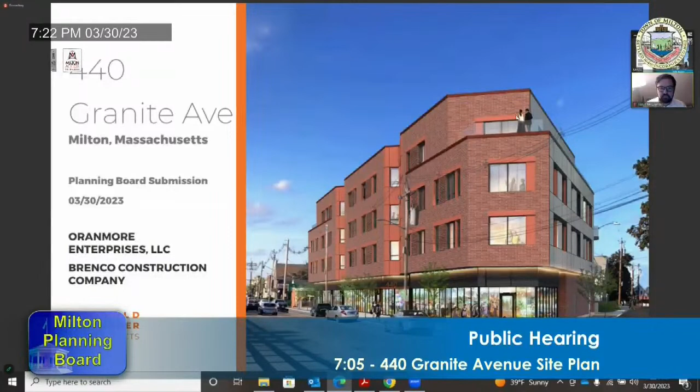So I think we're going to run through really what the substantive changes are. I know many of you are quite familiar with this project already, so I'm going to just go right at it. The main things we're going to discuss tonight are probably on several fronts. One is the design and material of the exterior, which I think is a pretty substantive change. The other big change is the parking situation. So let's just move right into the next slide.

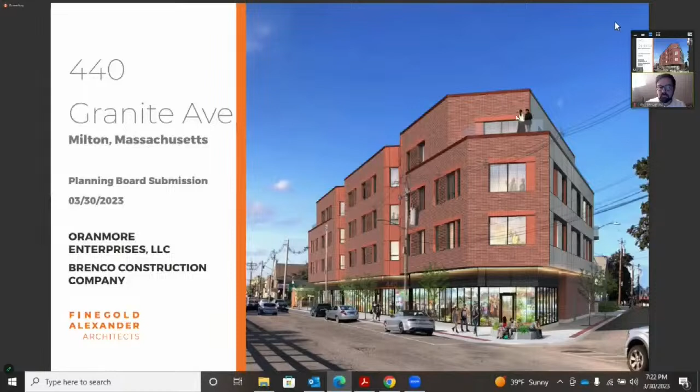Sorry everybody, I'll figure this out. Okay. Just going to have to do this old school style. Sorry. That's fine, Sam, that's fine. And I know that you folks, I believe, have the hard copies in front of you as well. Yes, in case you can't read this.

I'm going to just summarize the key things that this summary chart puts together. On the left-hand column, this is again the program for the project. The parcel is 20,212 square feet. We have total residential and retail support gross square feet of 46,253. Parking, which I'll explain in a minute, is 15,873. The total project size, gross square foot, is 62,126 square feet. The height of the project is 53 feet 2 inches. The residential mix is 24 units, of which 22 are 2 bedrooms and 2 are 1 bedrooms. Of those 24, 2 are affordable, 1 one-bedroom, 1 two-bedroom. And the commercial spaces we're going to show you tonight are 3 commercial spaces on the ground level, totaling 3,983 square feet.

With respect to the parking update, we've revised the design, but here are the facts. We now have, instead of the automated parking system, a conventional parking garage. So in the lower level garage, we have 19 spaces in what we call the basement, in that lower level.

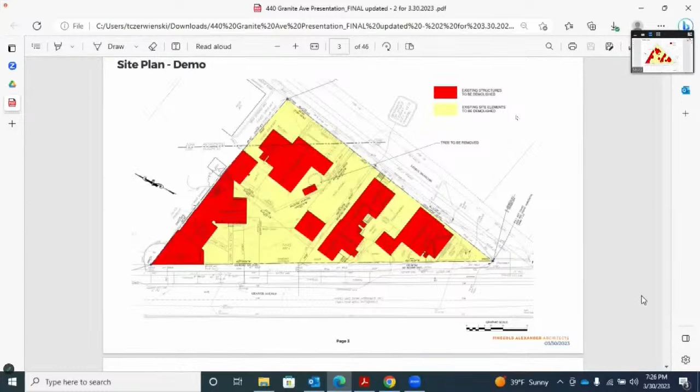This is the site plan. I'm going to get more into the details on the next drawing because this is just showing the context of the building in relation to the site.

I'm going to explain the primary changes here. The biggest change is that we have a more conventional garage. Coming off Mechanic Street on the ground level, the garage enters pretty much where we showed it before, but we are not doing the automated system.

This is conventional surface parking at grade, allowing a total of 16 spaces: 10 spaces for the units, 2 handicap spaces (one usable as a van space), and 4 spaces available during the day for the commercial owners of the retail tenants in front, which could also become overflow visitor parking after hours when commercial isn't using them. That totals 16 spaces on this first floor level.

In addition, off Mechanic Street at grade there are 5 surface spaces dedicated for commercial and visitor parking. So 16 here, 5 here. The other big change is that we created another access route, a ramp down to the basement garage below, shown at the edge here, dropping down into the garage underneath.

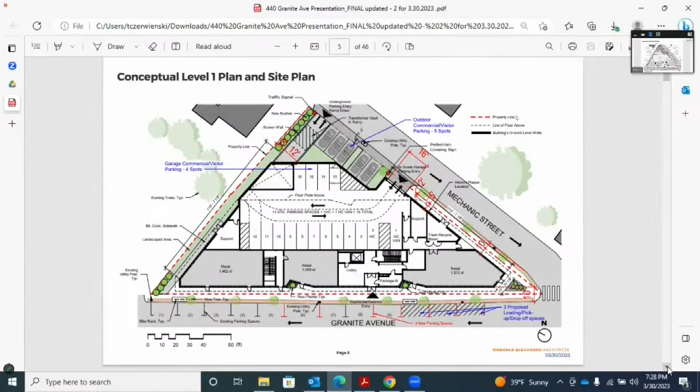Now when we come down that ramp off Mechanic Street to the lower basement level, we show a total of 19 parking spaces, all dedicated for residential use. This is a conventional parking garage underneath, with additional bike storage and unit storage here.

So this is again a major change in the overall design for the project. Any questions on that? Okay, thanks.

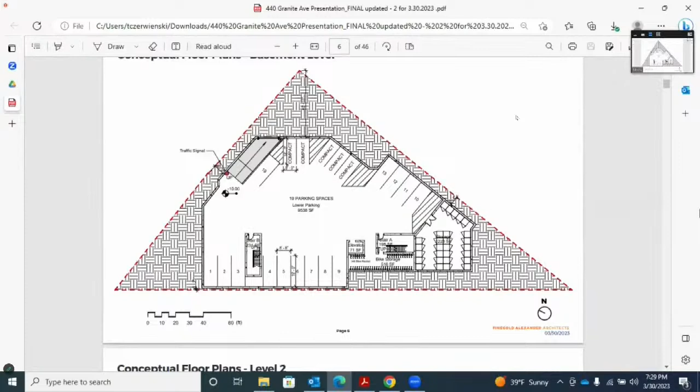I'm just going to go fairly quickly through the plan unit layouts. It's very similar to what you've seen before.

On the second floor here, we essentially have 8 2-bedroom units, one bedroom unit. This unit here is designated as the affordable unit, which is the one bedroom unit.

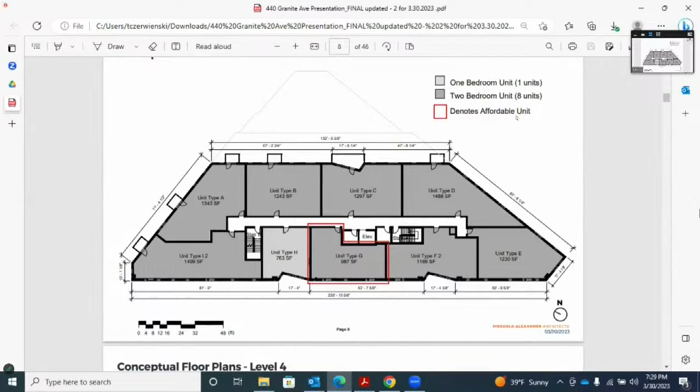On level 3, a very similar plan as level 2, but now this unit is designated as an affordable unit, which is a 2-bedroom unit.

Level 4, we have essentially just 6 2-bedroom units. Again, at the top level is set back from the edge by these continuous decks that you see outlined at the edge here and here.

The roof plan is, again, quite similar to what we've shown you before. The central area here is the screened-in mechanical, which also deals with the elevator stair overrun. We have proposed to create solar PVs. We still want to create a very sustainable project in the overall design, so that is the intent, to try to maximize the extent we can for solar.

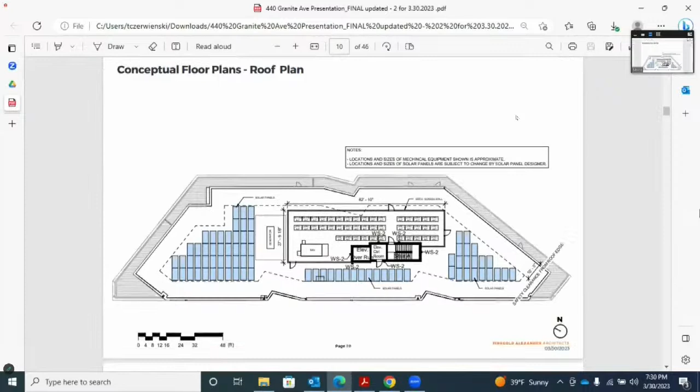I think what I'm going to do is just quickly go through - the elevations are black and white, but we have some colored elevations. I think it's more useful.

Just the key things to point out: the 53 feet 2 inch height is to the top of the roof of the 4th floor. That does not include the mechanical penthouse, which is an additional 8 feet above that. The main body of the building at 3 stories is 41 feet 2 inches. That is the governing number that drives through the whole design.

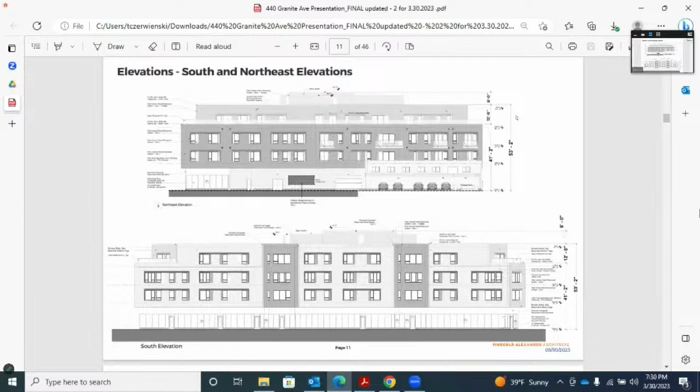The same thing's operating on basically the north and northwest, which is mostly Mechanic Street. Let's go to the next, which is getting into some of the color elevations.

This is the elevation shown along Granite Avenue here. This is like a section cut through the highway. But here you can see the design as it relates to the overall street context. Ground floor retail occupying the entire level, which you can see mostly glazed. This is the residential component here.

The 4th floor does set back at the edges here and here. And we still have the idea of these notches which carve in here and here to break up the overall mass in relation to the overall form.

But the biggest change, of course, what you're seeing here is color and material. We've really moved it to essentially a red brick approach. We'll get into more of the details, but we heard comments and we reacted, so I think we've moved it away from the previous iteration, which was more grayish color. So we're really proposing a red brick, and we have actually some samples here which we can certainly share or pass around if you like.

The other elevation that was asked for that we hadn't shown before, which is essentially the northeast elevation. This is the view from the bank, looking here. So again, Granite Avenue is here on the right, and this is a straight-on elevational view.

Here you can see essentially the edge here. This is where the brick turns on the corner, and then it goes to the plank system here, which is more rendered, sort of almost clapboard style from here back.

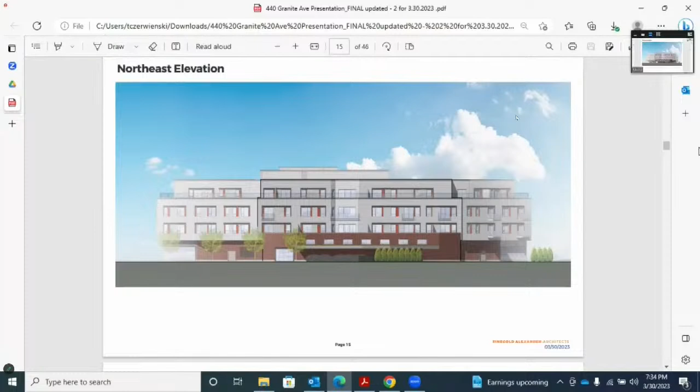So again, this is the before view from Granite Ave in the corner.

And here's the proposed redesign. Besides the coloration shift, we made adjustments where we took more of the brick and wrapped it to the corner. Previously this panel, we're introducing more brick to make the mass feel more substantive rather than just a facade. Then there's the introduction of notches, a panel system in between to break the scale. The ground floor retail is largely glass to create as much transparency along the street. Here you can see where it transitions to the panelized system on the side. That lighter gray color is where the brick turns the corner, and you can see at the bottom the brick also picks up here and wraps around the back on that elevation previously shown. So this is a major change in materials and color shift, and I'll get into some details surrounding the window frames as well.

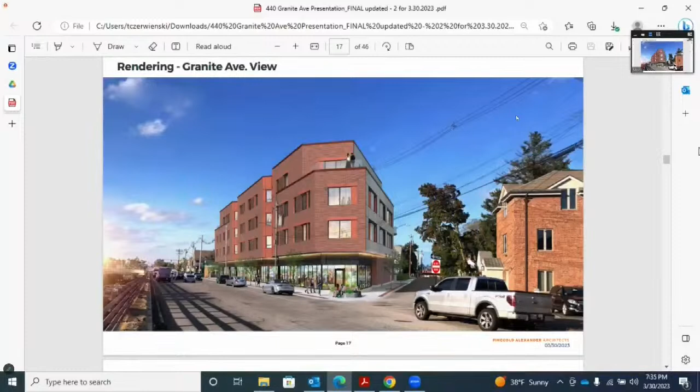So again, existing view from Mechanic Street.

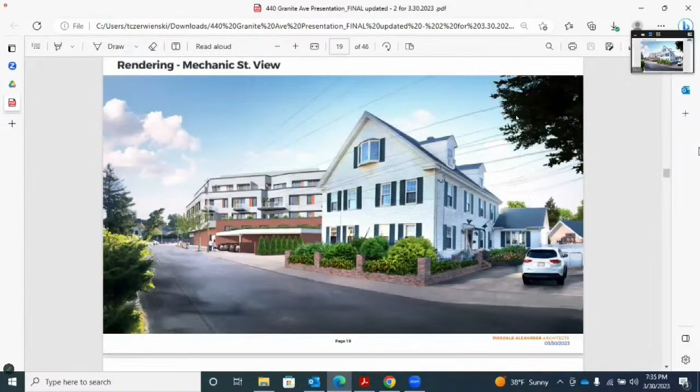So the revised design, again a substantive change. You can see the brick pulling around the base, this is again with the access. There are 5 parking spaces on grade, and the garage access ramp is behind these plantings to screen it, bringing it down to the lower level. The upper form is largely more of the clapboard-looking siding with various material palettes shifting and moving to create detail and interest. So again, it's a major change in materiality here.

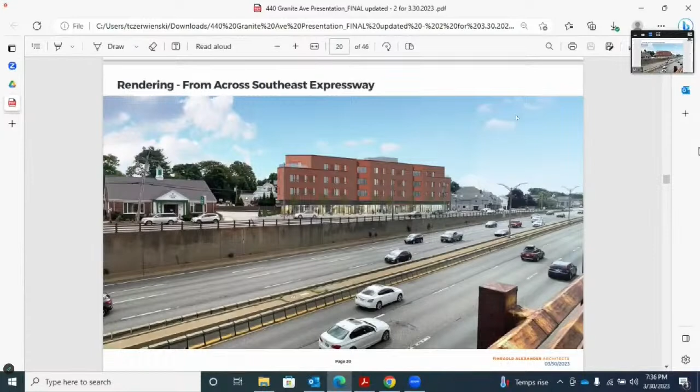Tony, is that a limestone look, or what is it? I think we're still looking at some kind of panelized system, we're still determining that. We have a granite base that runs along the continuous edge as previously shown, but we're still looking at that, Meredith, as far as what the material for the residential will be, but we're open to certain suggestions. Thank you.

And then this is the corner view at the intersection of Mechanic Street and Granite Ave. Again, the retail wraps around the corner here. You can see the brick here, and then it transitions from here to here to the siding on the edge.

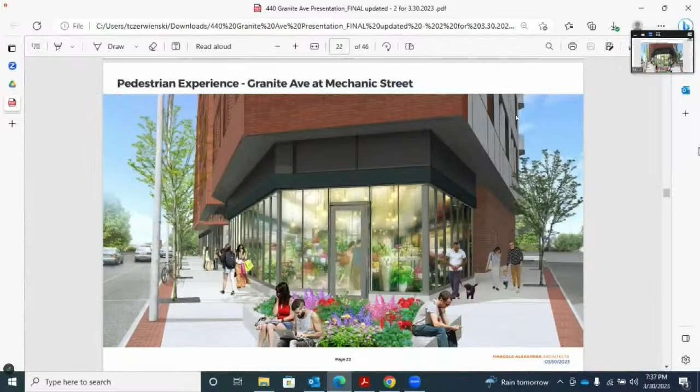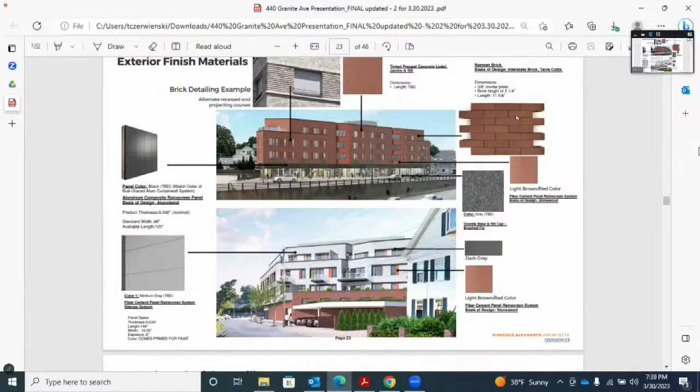The windows and the banding here, we believe, will be essentially very dark gray. We think that tends to be very elegant, and it also tends to disappear more. The sign band here, to be determined based on whatever retail tenant goes in, will create a nice area for signage for the retail tenants. So this essentially comprises the bulk of the details and palette that get into the facades.

And again, we have some samples here we can show you directly.

The other thing we want to point out, which was also brought up—there's an opportunity as well, when we're dealing with the ground level, we're also introducing that kind of alternating brick pattern here at the base. So when people walk by, it's not just flat brick, but there's detail and relief.

And in addition, we talk a lot about the idea of potentially a historic neighborhood informational plaque, something that describes this neighborhood, this district, and the history behind it. There's an opportunity to really create a kind of signage idea that's quite visible—it can be pretty large, depending on what material and information we want to place on that plaque. The idea is to really integrate it into the design of this facade.

So as we move around the corner from the retail, there's a fairly large expanse of blank wall that we can basically use to tell the story of the neighborhood on this site.

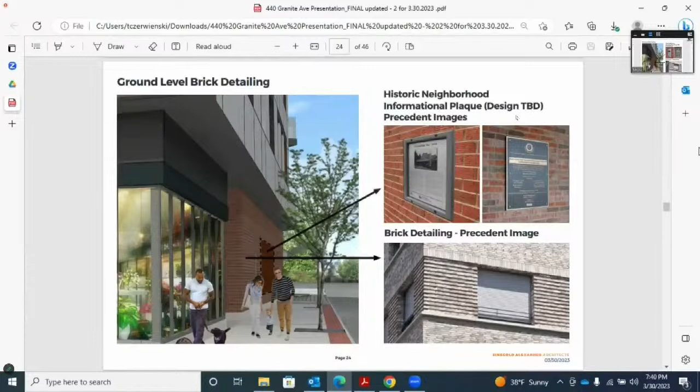On the landscape plan, I'll just stress a couple of things again since we've seen a lot of this. The key thing is, on the access ramp going down to the garage, we still have the proposal for vertical bushes to screen that edge. There is a wall here related to the ramp, but we want to soften it, especially with respect to this neighbor over here.

We still have the idea that transformers go underground, and there are certain utilities, light poles, and other things. The sidewalk will still be an all-new sidewalk with granite curbing and brick edge, very much along the lines of what you have up the street in the town square. There's a special planter at the corner, which is decorative but also adds a little safety. Again, we're mostly trying to soften the edge to the extent we can along the perimeter.

The other thing I'll point out—I think Cheryl raised this—along this edge here, because there's a fair amount of vehicles coming in, we are going to create a special paving pattern. So it's not just going to look like asphalt; we want to make it look and feel something more special, making sure whatever we do here isn't just an extension of asphalt. That was a really strong and good suggestion, so we're definitely incorporating that idea into this design from essentially this curb cut to this curb.

And I think it's required by the engineers—they asked that it be pervious.

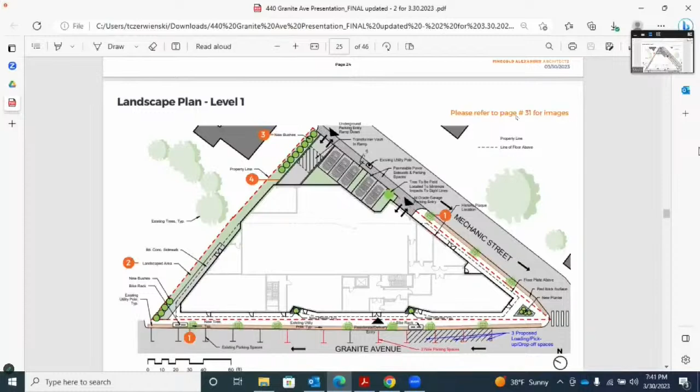And just very quickly again, we have green roofs still proposed on top of this area that screens the parking below. Next.

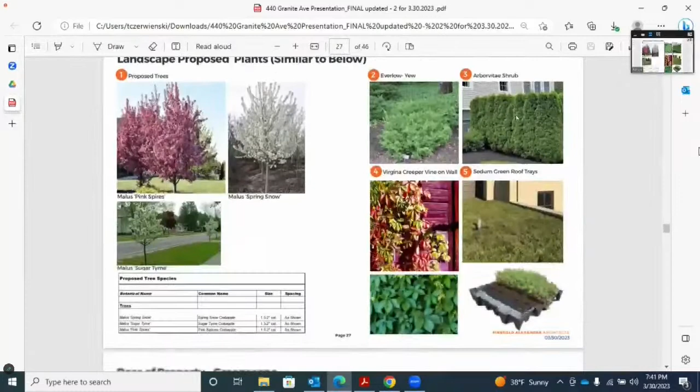Again, we want to create a range of decorative planting, the green roof which is sedum. This is the arborvitae shrub that screens the ramp down. Trying to create some decorative planting to the greatest extent we can. All subject to reviews, but the idea is to create attractive landscape feature elements around the site and around the perimeter and the base. These were things proposed initially and still are proposed in the current design.

I think that reaches the end. One more, let's just see. Go one more, yeah. So I think we can leave all this here.

This is a shadow study previously shown. Happy to go into that, but it didn't change from before. And then at the very end, it's all the lighting and light pollution analysis of the site. We have all that information here if you wish to get into it, but I figure the main thing we want to talk about is the design.

I'll stop here if we want to back up one slide, or whatever slide you folks wish to refer to. I think that concludes our presentation. Thank you so much, that's great.

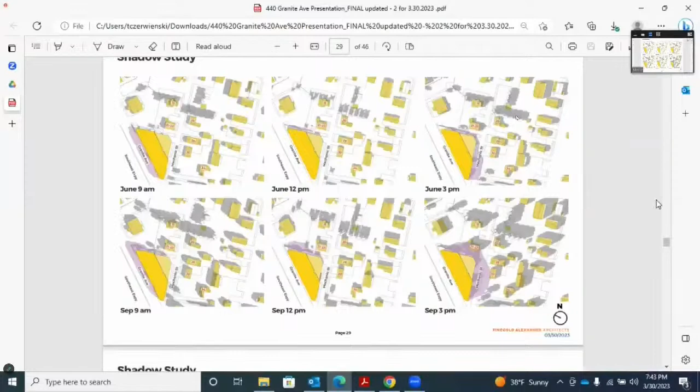Were there any questions that were not answered that the board would have? And then we can go to comments.

Well, they're waiting. The lighting on the building is very interesting. Is it underlit? I didn't see anything unless I missed a detail, anything on the lighting, the exterior first floor lighting. There's no freestanding lighting.

The lighting on the exterior and the upper floors is the minimum that's required for safety. And it will be off when residents are not using those areas, or we don't need them otherwise. Those are attached to the building, and the technical specifications suggested, it's as usual, it would be this type of lighting.

I think they are in these plans, we just didn't go through each page with you. In the garage, again, there's no exterior side lighting, for example. So there's no lighting outside the garage that would point towards the neighbor's house. There's roof lighting inside the garage, and it's really going to be inside now because of this design. It's really not going to shine out at all.

Before, there was an open area, and we had to be careful that it wasn't casting light onto the neighbor's property, but we also had to make sure there was enough light so that it would be safe under the green roof for that part of the garage. So now it's all inside lighting.

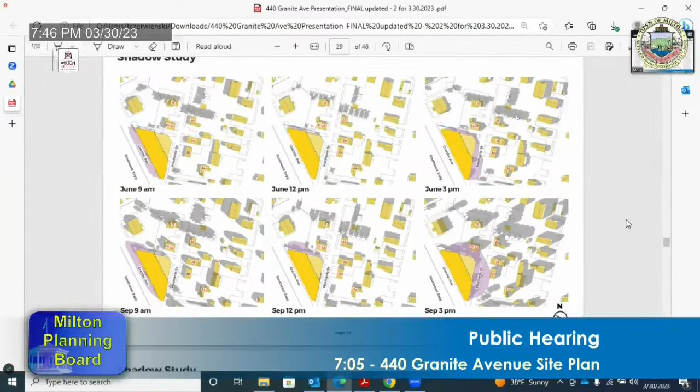I think under the cantilever, it looks like there's lighting, and I'm just curious how that's done. If you want to back up, Tim, are those spots underneath there? The idea of those is minimum necessary for brightness, again, with all the restrictions. It's not supposed to be cast on neighbor's property, but it's also supposed to be enough to provide safety, so that at night it's completely different from the way it is now. It's just a dark corner now with small buildings. When this building is constructed, you have this cantilever, you have little lights underneath it. I guess that's what I'm asking, what are those, are they recessed lighting, or what are they?

They're recessed in the roof, illuminating the underside of the overhang. That's slide 22, if you want to go back. So like, is it spots periodically, or is it continuous? The idea is it's a continuous strip, and that'll be on a timer. It'll go off at a certain hour, so it's not on all night. Okay, okay.

That will be visible. You won't see the lighting element, it's in the ceiling, you'll just see it glow. Okay, that's what it looked like in the paper. That's how it's written, didn't want to just make assumptions.

As far as exterior lighting, if we showed front lighting in the previous plans, it's still there, but I don't know that it's any particular design, like lighting by the front door. I don't think we provided a specification for the type of light, and the design has changed a little bit, so I think it's something the developer needs to look at and design appropriately for what it has now.

I believe there are street lamps, that's part of the sidewalk, that's required anyway, that the city's going to be doing. I mean streetlights, yeah, which is actually my second question.

We talked way back about putting the wires underground, utilities, and maybe doing a street pole versus just more of a lamp post look, similar to what's on Central Avenue, 36 Central, or Eliot Street now. I don't know if that's anything we talked about with the utilities going under, so I don't want to make an assumption that lighting will be done, but it has been done on other projects, and it would be an opportunity to enhance the streetscape here.

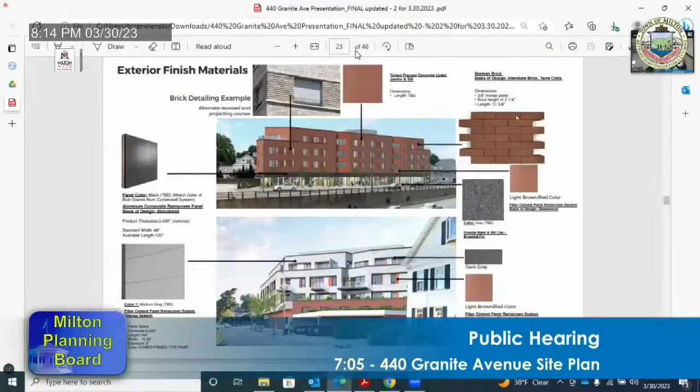Is it not the one we're looking at? It's a different one. Okay, sorry. It's the one directly across from the bank, across the expressway. And I guess my question - it's similar to this, just a little bit more dramatic, more of what your actual...

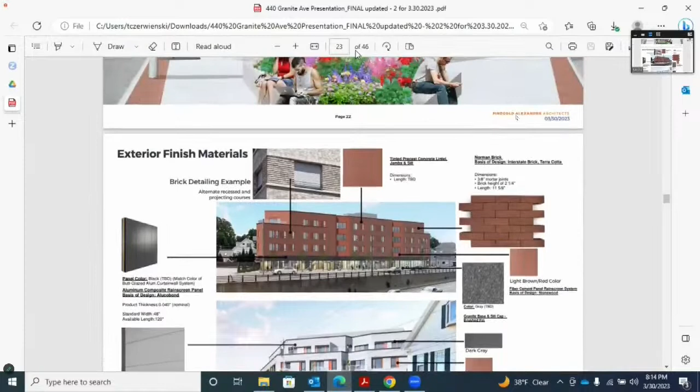All right, Tim, I don't know if you can hear us, Chris, as we're going to slide 13. Which slide do we need? I'll continue with my question, Marion, while Tim gets us there. What slide? 13.

The change in the color creates even a greater contrast now to the mechanical equipment on the roof, and this slide is probably where it's most noticeable. You mean the screening? Yeah, that's what that is. Is the mechanical equipment screened?

Yes, that's what that is. Part of the plan is - because the planning board always asks for it, so we included it - that the mechanical equipment will have, is higher than the equipment, there will be a screen around it, which is the reason that it counts in the height, because it has the screen. Could you be asking for a different color?

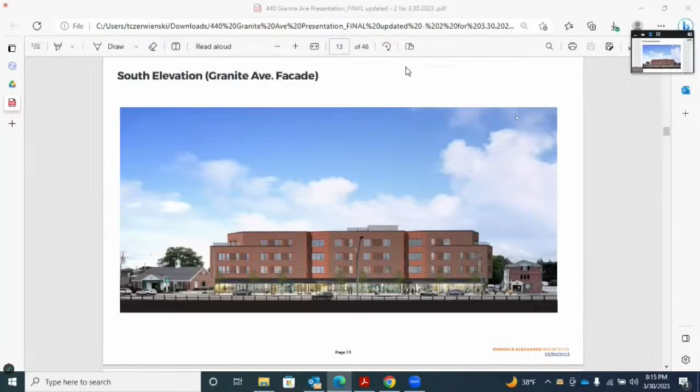That's why I'm asking about the color. I just don't know - you're the architect on the board, what's your point of view? Well, as for the color of the building, the lighter color, to me, will kind of have it drop away a little bit, rather than the darker color.

You should have rendered it with a gray day. Yeah, it just came to my attention looking at that rendering. The one thing about the frontal elevation views is you oftentimes don't perceive things that way, but here, where you're across the highway and some of those homes are elevated, you might see it this way. I do agree with them on the lighter color, Sean.

Yeah, that community across the highway, they're looking right at it. What's happening now is we're bringing something that, as you said earlier, is large and long, and it'll be a very different view for them than what they've had.

Yeah, I don't know what the right color is, but it looks quite obvious now. It looks gray there, but I don't know if we even really picked a color. Did you pick it gray? I think it's gray because it appears a more pale gray than a color, like that panel.

So that brings me to one of the questions I had - the plant material choice along that area was crab apples. Crabs only get to be about 15 feet in height, so I'm assuming you chose those just because of the bump out of the building.

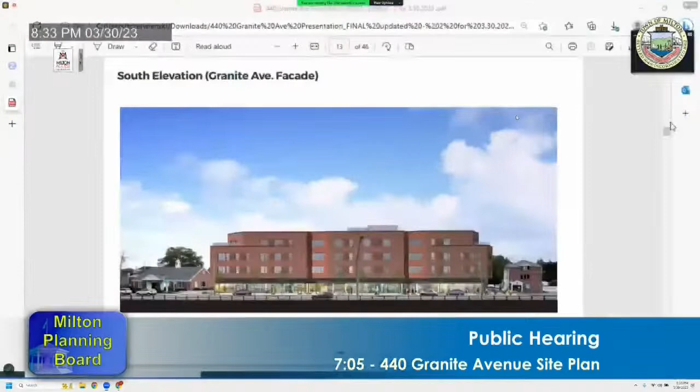I'm going to bring up the site plan, and I just wanted to see if you could talk for a minute about how you anticipate the in and out of the parking to go. The 16 foot on the surface mechanic street is what it is, and that 12 foot two-way down the ramp into the basement - I see there are traffic signals, but could you give us a play-by-play of how you anticipate people going in and out, and how to handle the conflict of someone trying to leave and someone trying to come in.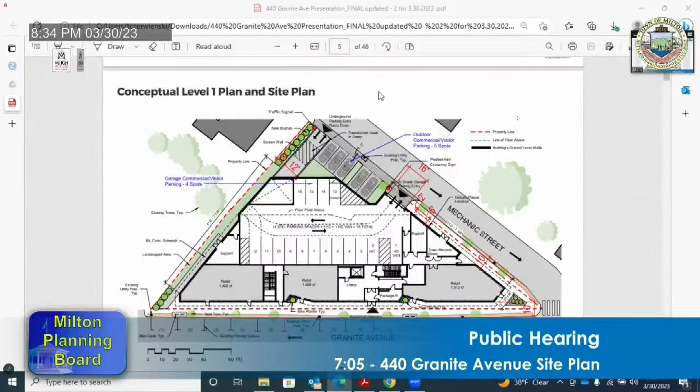Thank you for that question, we did anticipate that might be coming. So a 12 foot width is nominally more a one-way width, because normally you need on the order of 18 to 20 feet if you're truly doing a two-way ramp. But we believe that with signalization at the top and the bottom, for two reasons - one, if somebody is coming down into the garage and someone below is trying to go out or come up, since it's all going to be card key access when you enter the garage, that will immediately trigger a light situation in the garage, so that if there is somebody below, they will know that someone is coming down.

I live in Cambridge. I have an underground garage that parks about 20 cars, and on the rare occasion when I come out of the garage and someone's coming down, we don't have a light signal there. It's literally just the garage door starts to rise, and I know someone's coming down. But we'll have that, and we'll also have the light issue. It's also a safety issue at the top of the ramp, so if anybody's walking, they'll know the car is emerging, and the car will know too, so they won't be conflicting.

Given the number of cars in this, which is currently 16 spaces below, on the very rare occasion where a car coming down and a car going up occurs at the same time, we believe between the signalization, the card key access, and the lights warning that someone's coming, that will act as the safety measure. We're in conversation with our parking consultant on all of this, so there are ways this works. We have a project in the city with an even more difficult situation, a narrower ramp, only 10 feet wide, cars going in and out, and a much more urban location with less ability to queue. We believe it works, but that's just how we feel.

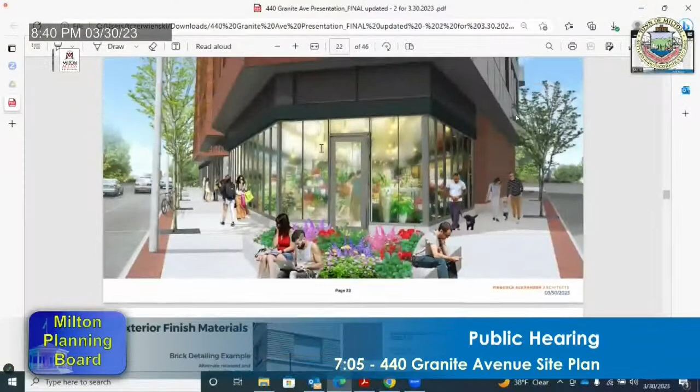So the material on the underside of the overhang, where the second floor protrudes out beyond the first floor—is that the same material you're proposing for the facade at the residential entrance? We haven't really gotten to that level yet. On the underside of the overhang will be a metal product. The product suggested in my watercolor sketch, I think this is still TBD. We're really looking at something cementitious—attractive, durable, resistant to wear and tear. It's going to signal the residential piece, but what that actual material is, we're still studying.

So in the sketch, you had mentioned earlier that the base below the glass you see as granite. Yes, this part here. And that looks like it's tall—what is it, 12 to 18 inches? Yeah, 12 to 18 inches of granite. Would you consider using granite at the residential entrance?

We could explore that. We haven't really gotten into that level yet. I mean, there's a richness to granite that really makes that entrance look special, there's a relevance too—it's like the granite railway. Exactly, and right down to that. We want to do something inside as well. We have a very large lobby, and we want to talk with the library and get some historic pictures. We haven't named the building yet, but we're leaning towards something in that field.

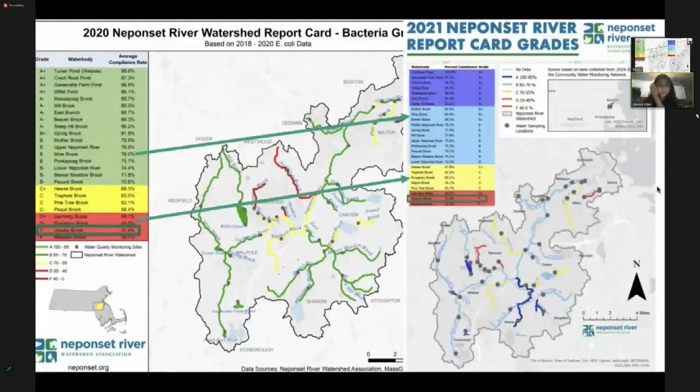So talked about that. Yeah, so streets and parking lots are some problems, but if we know that regulations can be made to better treat our stormwater, we have to give the state a schedule that we will update it in. We have to also make certain that at a minimum we specify in our regulations that we do allow green roofs, we do allow infiltration practices, including rain gardens, curb extensions, planter gardens, and pervious pavement. And we also explicitly allow water harvesting, like rain barrels, for use of stormwater or for non-potable usage.

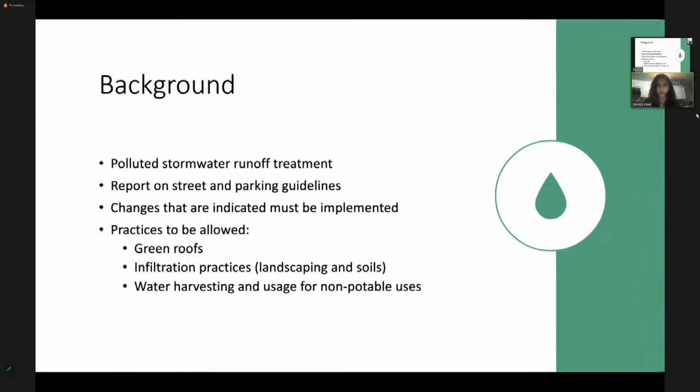Okay, may I ask you a question? Yeah. So currently our stormwater bylaws, do they require even single-family homes to put the stormwater from the roof into a system that's not a rain barrel or rain garden?

So there's no necessarily, you can't use non-potable water for certain things. It's not applicable to gray water, you can't use gray water for certain things. But we could make it, we could do that, and that's something that they want us to put in our regulations and us to have a schedule for when we can put that in our regulations.

This permit is technically a long-term permit, but this is not giving us a lot of leeway for when we can change these things. But do our stormwater regs right now even allow for these other things? That's what I'm trying to understand.

They don't mention them, and that's kind of the problem with this task. And I've talked to the building department, and they're like, yeah, technically we don't disallow it, but it requires the developer or the person themselves to come out forward with it. And that's one of the things that I'm going to put in later, that we should come out of the gate with that and say, can you do these? And if not, why? Why can't you do these things?

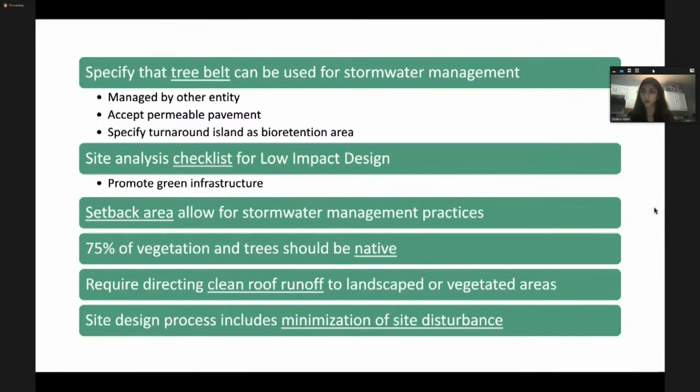So I'm going to go into a little bit more specifics on all of them, so bear with me. For specifying that the tree belt can be used, these are some of the words that we should use, recommended by MS4, the EPA, NepRWA and some other organizations that are very into these things.

Tree belts may include bioretention areas or other vegetated stormwater systems. Bioretention areas should utilize non-invasive species that can tolerate cycles of drought and inundation. There are some pretty trees out there that would look great on the tree belt next to it. That's not the point. The point is what is native, what is non-invasive, and what can tolerate.

Last summer was a very intense drought season for a lot of trees. The DPW is considering shifting our planting season because the spring trees might not survive the drought this year.

Allow for bioretention areas or other vegetated stormwater facilities within tree belt areas, and to count toward other required landscaping features, including site parking or perimeter screening. This creates areas that function on several levels, including aesthetics and stormwater management. These could be managed by the ongoing entity it's owned by, for example the HOA.

We should also be clear that the engineering department can do the same thing, basically giving the engineering department free reign over this, saying, at the end of the day, some of it DPW has to deal with anyway. So you guys figure out what's best for you. Well, maybe I'm part of the engineering department, but what works best and what is going to create less runoff to go into our drain system.

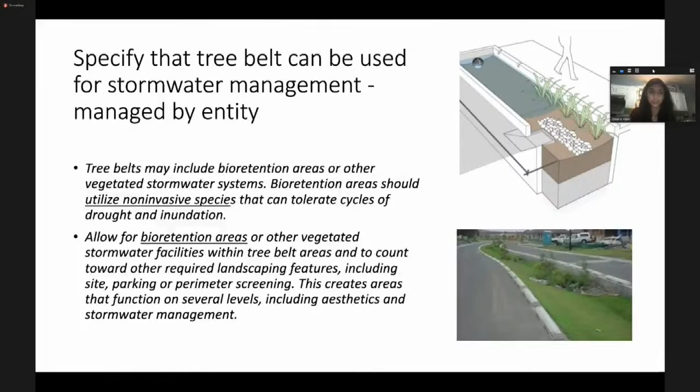Again, when appropriate, use of permeable paving is allowed for road shoulders and parking lanes in residential neighborhoods, and for sidewalks as compatible with ADA and Massachusetts Architectural Access Board design standards. So of course compliant with certain things, it has to be the same grade, all of those things, but it can be used.

It does have some different management, so sand can go in, etc. Again, management does not have to be on the town, and we can also prefer it because that creates less stress on our drain systems.

The other thing is that alleys, low traffic or secondary emergency exits, and shoulders can use alternative permeable materials. There is somewhat of a push against using permeable pavement in certain emergency areas due to the management of it. It doesn't have to be on every single road, but where we can do it, where it's low traffic, we can put it there, and that would work, and it would still have less management.

It increases traction when it's wet, instead of becoming a problem, because it doesn't pool and it doesn't need salt or plowing. So again, a whole section that the town itself does not have to deal with. The building department allows it, they're totally fine with it. But you, as the developer, as the person dealing with this, have to go and say we're going to do permeable pavement. Again, why are we not pushing that in the beginning?

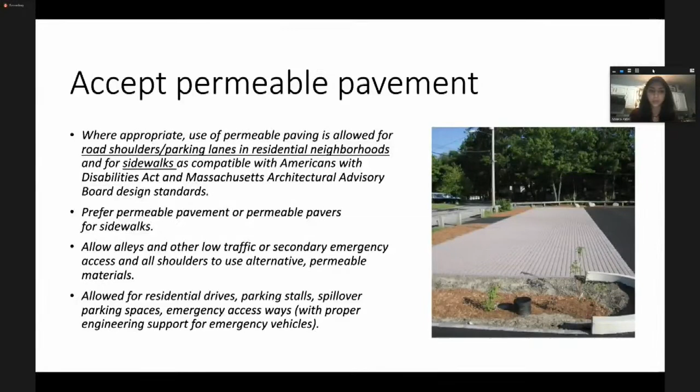This is such a small thing, specifying that the turnaround island can be used as a bioretention area. It doesn't look as nice when it's grass. It doesn't look as nice. Why not make it a bioretention area?

So all dead-end streets, all cul-de-sacs with turnaround islands may be planted with trees and/or other vegetation, or left with natural tree growth, instead of paving the entire area of the island. The maintenance of the inner island shall be the responsibility of developers, their successors and assigns, or a homeowners association. Again, not putting it on us, but saying honestly, it looks better, and it's better stormwater management than paving it.

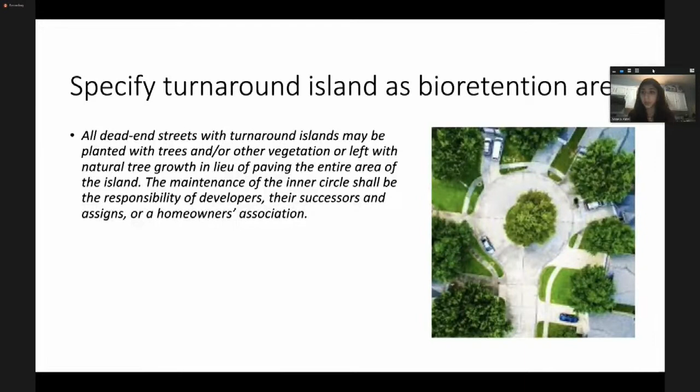Next, please. And this is what I've been talking about. So...

Franklin actually does this. In the preliminary process, it would be a meeting with the planning staff and the board, strictly to discuss the usage of low-impact development practices and create an operation and maintenance plan for the practices that are implemented. Whether figuring out if DPW has to do it, or pushing it on the developers themselves and saying, you guys have to deal with this, but you have to do this, or why aren't you doing this?

So practices such as green roofs, water harvesting, infiltration, green infrastructure, dealing with all of that from the get-go instead of going through the plans and then saying, okay, you said you were going to do this, why aren't you putting a green roof in it? In the beginning, if we say put the green roofs in, we would prefer you do that. It's easier on...

So next, please. Again, this is the actual checklist.

So the goals would be: create a visually appealing community, stabilizing and increasing property values, encouraging low-impact development, preserving the town's historic and cultural heritage, and protecting Franklin's natural environment, including habitat, water resources, and ecosystem services.

Again, this would work so well for Unquity Brook. If we keep doing even these small practices, it helps. It keeps helping. Yes, we're doing these huge BMP practices, best management practices, behind town, behind the police department, in the fire stations, behind the school. Yes, those are big projects, but if we keep adding little drops, as my mom actually says, every drop fills the bucket. It keeps filling the bucket.

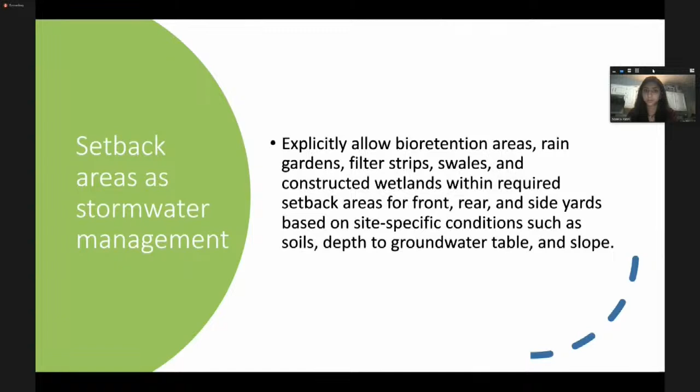Next. Requiring at least 75% native plantings, and site design process includes minimization of site disturbance, directing clean roof runoff to landscaped or vegetated areas capable of absorbing this.

So streets shall be located and designed to minimize disturbance of the site's natural features and environmentally sensitive areas, vegetation, trees, low areas, and cut and fill, thereby reducing disturbance of native soils and unnecessary contouring of the site to preserve natural topography, because nature's already decided where that water's going.

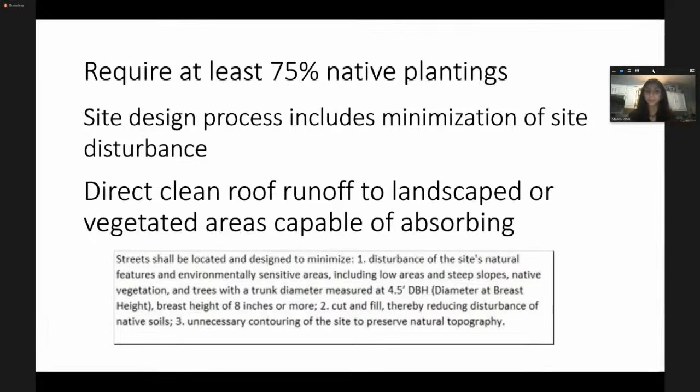So at the end of the day, we should also talk about why we have to do these things. Some of it seems common sense, but we should add other reasons. First, we're required to go on the permit, and it requires a schedule in which we will change our bylaws and regulations. These are just the smaller ones. There's an entire green feasibility report I can send out afterwards - 18 pages of what we need to do and why.

Storms and flooding are just going to get worse with climate change progressing, so we need to deal with that. We need to be proactive instead of later asking why Milton is flooding. It's not just beneficial for stormwater - it can reduce the heat island effect, and it increases property value to have these aesthetically pleasing management practices. Neighboring towns like Franklin have already started this, so we should be part of it and lead the charge.

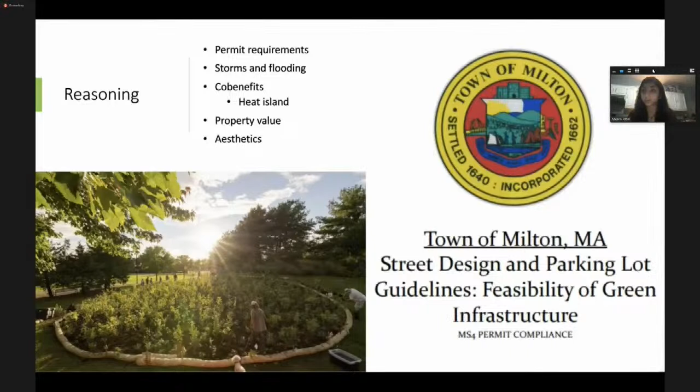Thank you for having me again, and I hope we can do something about this. Thank you so much for presenting.

That was excellent. Just to quickly follow up on Mira's presentation, if the board wants to discuss this more tonight, great, or we may want a further discussion later. As planning and engineering staff, we'd love to present a menu of regulatory and zoning changes. This was meant to be an introduction to what we've got to do for this permit, consistent with a lot of what the board's been discussing for a long time. I'm hoping there's not much debate, but more about how exactly we're going to implement this stuff, and put together language for future changes to the regs and potentially zoning.

I think we would all be in favor of that. I can't see why not. I hope you share it with the Selectmen and the Conservation Commission, as they are suggesting taking land out of conservation and clear cutting it.

I don't know how the other members feel, but I'd like to move on to our next agenda item tonight. We can put that on for the 27th and talk more about it. I agree. Absolutely. Does that sound good? All right, we'll add that on the 27th.

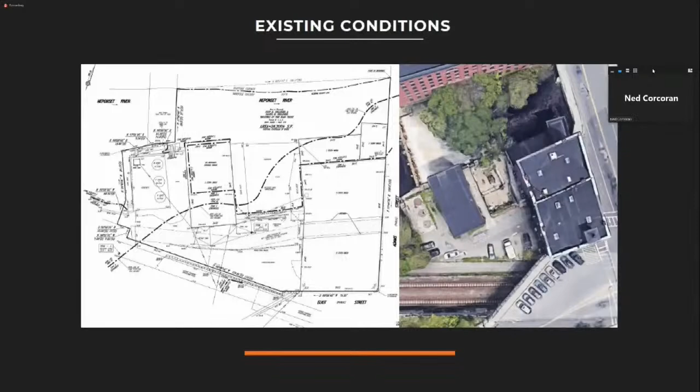So when we started this design process, one of the first things that came to mind was how do we give the front building the proper credence it deserves to sit at the forefront of the design, and how do we not modify what's clearly a beautiful, incredibly well-built set of infrastructure back there.

So these renderings are very initial massings, so please don't assume that this is what it's going to look like. This is really just to give you a visual representation of what the connection would look like. So again, this front building's existing.

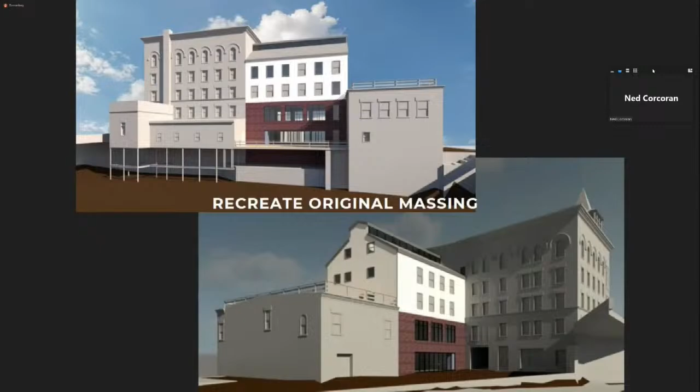Go to the next slide, please. So these are actually laser elevations done - the architect I'm working with had someone go out and laser the entire site, so these are actually contextually accurate for size and scale.

As we move through this process, I'll have my rendering company do a really detailed 3-dimensional version. This is really just for visual depiction, but all of these third floor elevations and top of windows are relatively accurate. So the goal is to connect the two and recreate what used to be there.

And if you look at old historic photos of the building, it actually shows this vantage of the waterfront - it's much more attractive. Right now, when you're standing at the bridge looking at the site, it looks like a dilapidated building because it's not connected. Next slide, please.

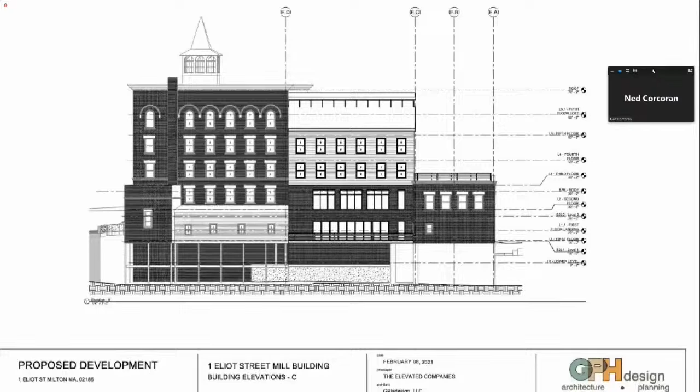So again, if you're coming from Steel and Rye, walking down the bike path, this is the vantage you would see right now. There's actually a shadow of this right now. If you're standing at the bike path walking past the site and you looked left, this is what you would see.

So we're proposing retractable glass here on the ground level for a restaurant. Both sides would be retractable glass. There'll be a deck over the waterfront. I think you'll be really excited by some of the visuals I have for those concepts.

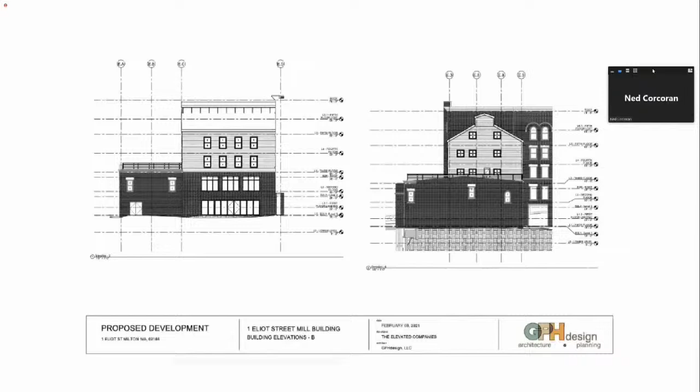But this is commercial, this is commercial, this is commercial, this is residential - commercial, commercial, residential from that vantage. Next slide, please.

So this elevation will remain entirely intact. This is the elevation you see right now from Adams Street. So if you're standing at Extra Space Storage, this is what you see.

And then if you're standing at the Bank of America building and looking across the street, this is what you see - and we'll start to model this as we go through so you can see what you would see from the overpass there. But this is the vantage.

So we're not proposing to modify this building at all, other than replace the windows and do any repointing that's necessary. But I think we can all agree that this is a stunning building and it's incredibly important to the town of Milton.

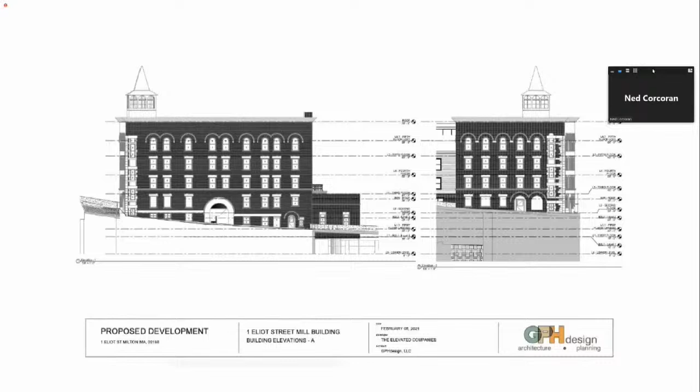The goal is to strengthen this building by making the rest of the site congruent with its beauty. Next slide, please. So I'm going to go through some rough massing floor plans just to give you an idea of how the building's going to lay out. And again, I know we're short on time, so I think the tail end of the presentation is a bit more exciting, and it's getting late.

The existing gym that's there now, I actually operate. That will be closed during the renovation, and then we'll come back.

On the lowest level, this is where the restaurant you'd walk in. This is going to be a part of the restaurant, and this will be the deck over the water, supported by the bar, restaurant, brewery component. This will be office retail. This space is still up for debate; I personally like the idea of a bakery or coffee shop. It has access from Adams Street, so I think it would be great if we can leverage the infrastructure of the commercial kitchen that'll be here and have that service it, maybe even potentially have two operators leverage the same kitchen.

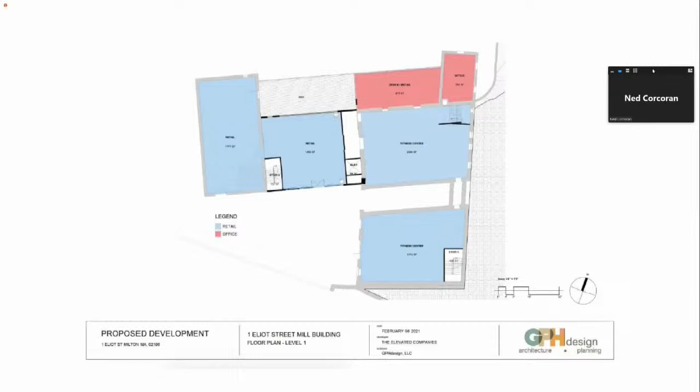But this is the lowest level. If you go to the next slide, right now the building has a handicap accessible entrance at the Eliot Street elevation, so the main building entrance would still be from this. Right here we have a small retail space.

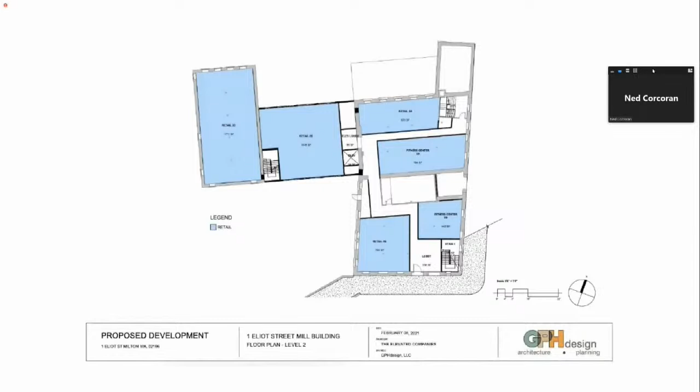Again, in a perfect world, I'm thinking like a juice bar, something fast, something takeout, something convenient. And then the gym would have multiple small rooms up here, like a personal training room, cycling room, yoga room. And then this would be a retail function area for the commercial concept out back. The idea there would be anniversary parties, wedding parties, baby showers — give Milton a place where people can go other than East Milton Village, because right now Milton Village doesn't have much for that type of stuff. Next slide, please.

This is how the residentials would work. They're all relatively small units — 25 units total. We have 4 three-beds, 7 two-beds, 5 one-beds, and 9 studios. So they're designed to be more transient units, with the T right across the street.

Like Ned said in the beginning of the proposal, we're not proposing any parking, so I don't have parking in the rear there. The point I think we're going to stand on is that whatever little parking we could structure back there is going to take away from being able to activate that space and increase pedestrian traffic. I don't think the benefit of getting those handful of spots back there would do any substantive good. If anything, it would deter foot traffic and deter the flow of commercial traffic going from the bike path up to Adams Street.

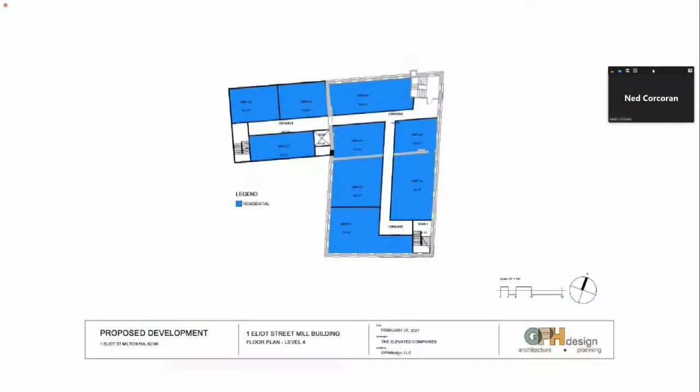Next slide, please. And then this would be the top floor as well. So again, very early on, these are just kind of typical floor plans. Next slide, please.

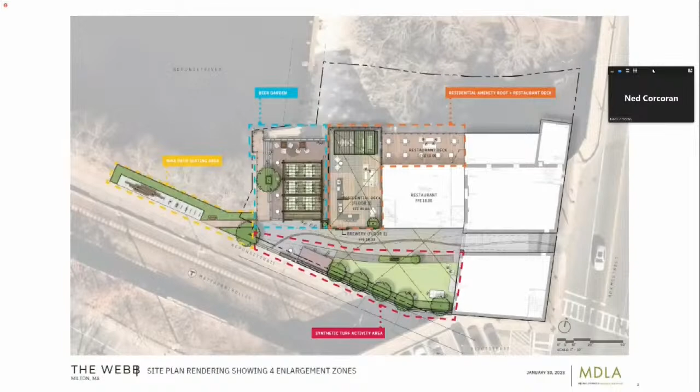I'll give you some quick design inspiration. The old rail line that's there, we want to reuse and make an interactive trolley thing for the kids. Imagine an antique trolley sitting on the tracks, and when you're sitting in that flexible turf area, the kids would have something to play around with that slides back and forth. We're going to come up with brewery signs that mimic the chocolate drying screens at the mill. The circular covers still there from the pulverizing mill, we're going to leave those as part of the floor for the outdoor seating area underneath the steel trellis. The design palette will match local precedents, specifically the Baker's condominiums next door.

My landscape architect who helped me work on this is actually the individual who did the upgrade to their patio area out back. So we're going to pull up the cobblestones that are there, get other reclaimed cobblestones, and recreate the path. We'll pay homage to the hot cocoa and chocolate flow with a cool dark stream through the middle of the path. The design features are really focused on bikes, exercise, community access, and an active, healthy lifestyle.

This is going to break down each of these areas in sections to give you a little more detail. So this is a steel trellis. Right now I have a lot of kids that try to fish in the river and there's no safe access, so what we're proposing is a community fishing pier and stadium seating—these are stepped seats.

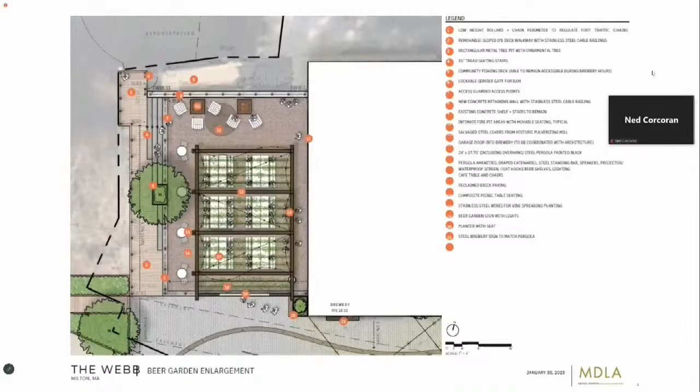So this is what we're proposing, and again these are rough graphics—this is a very early stage. But conceptually: steel trellis, stadium seating, community access, outdoor area, dog friendly. I want to be clear this is not like a brewery concept like Treehouse or Trillium—it's more like Steel and Rye, a family friendly, food-forward concept, less about beer and more about the ability to sit outside with your family or dog and have a drink.

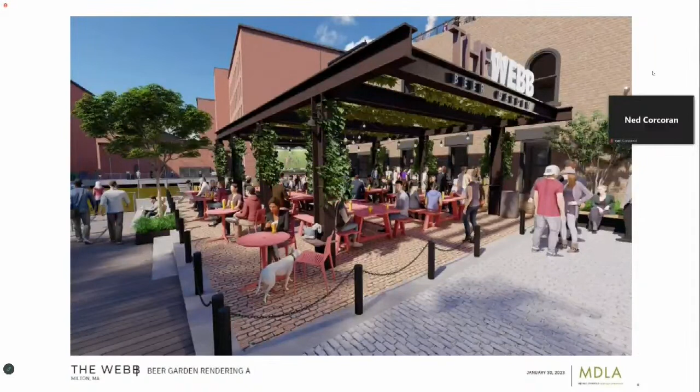So this is the vantage if you were standing at the water looking back at the bike path. And this is what it would look like from this side—again, garage doors. We'd have an outdoor TV, so if a Patriots game was on or something prominent, you could sit outside and entertain and really enjoy the waterfront there.

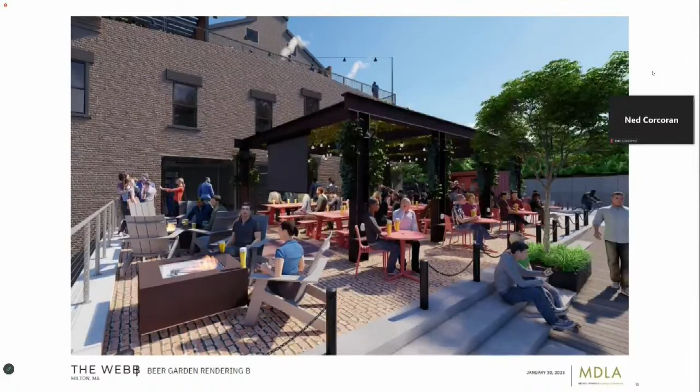And this is what it would look like if you stepped inside of it. Not everybody will have a beer.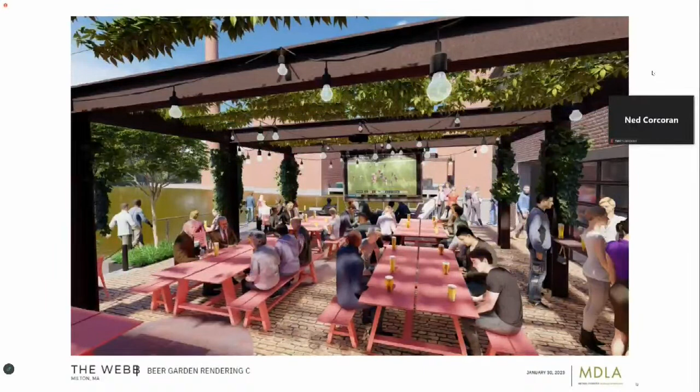What we want to do is make this the kind of outdoor flex space. It's going to have a bunch of flexible seating, Adirondack chairs, maybe cornhole, or some sort of ring toss or fun outdoor game. We're looking at putting maybe a couple of fire pits, on a beautiful fall night you can sit out here.

This is the existing train track. And again, this is the concept I was referring to where it becomes almost like a model toy train that the kids can play on.

This right here is actually a storage container, and the thought behind this is that it will be pop-ups. Seasonally, in the fall and winter when everyone's walking on the path, it could be hot chocolate and cider and apple cider donuts. In the summer, it could be lemonade and popsicles.

I've talked to several vendors who are incredibly excited about the idea of this. It doesn't have to be the same operator as the restaurant food establishment. I'm actually thinking the opposite, that this would be pop-up seasonally where operators could come in on an intermittent basis.

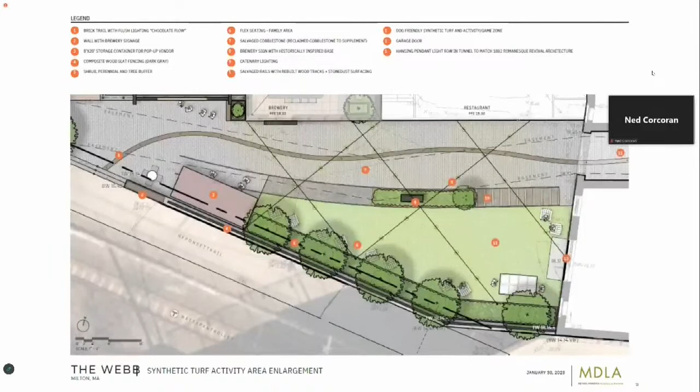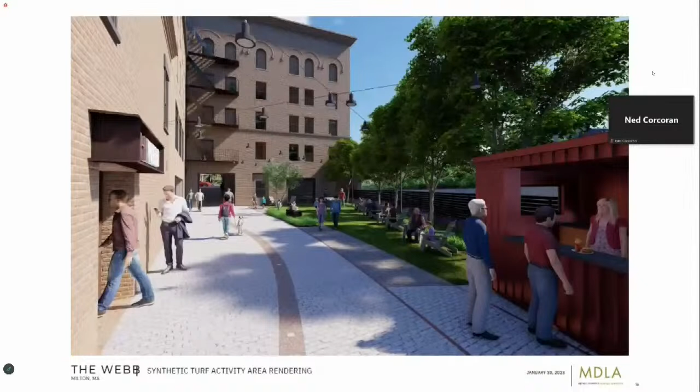So storage container, turf area, flexible seating, just consistent flow of traffic. The way I think you want to think about this is that traditional commercial storefront is usually podium style construction, usually on Elm and Main Street. I'm actually looking at the bike path as almost being commercial frontage.

I don't know if any of you have been to Bow Market in Somerville, but you almost walk through this small little alley and then you come to this pop-up food mart. Very similar. I want to have a really grand kind of entrance as you come through the tunnel, with really ambient lighting, and then all of a sudden it's totally different commercial frontage. We have a tremendous amount of foot traffic on this bike path, and I think it's an awesome opportunity to leverage that.

Next slide, please. As you're coming down the tunnel, this is the vantage point. Next slide, please.

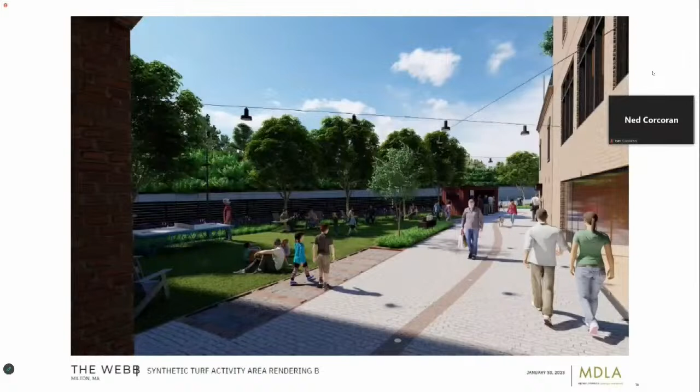And this is what we'd be trying to shoot for. So again, this is reflecting ping pong, but it's just representative flexible seating of Adirondack chairs. If you've got a big group, you can put them all together. Just common flow of all public access.

And then anywhere that's part of the restaurant will be closed off with staff checking who's coming in, coming out. This is more anybody can come and you can hang out there. It's really just about access. Next slide, please.

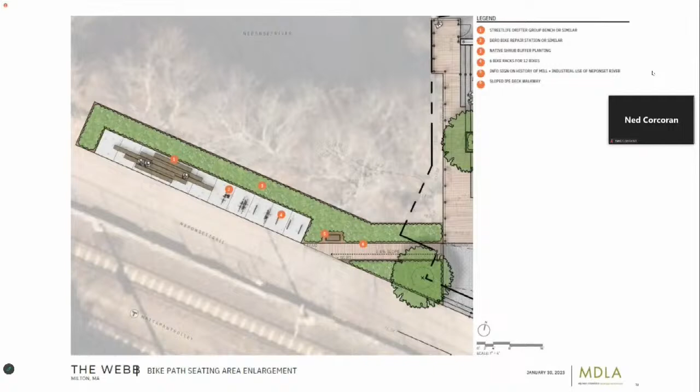So this is the area that I do not own right now. It's all just kind of overgrown weeds. Next slide, please.

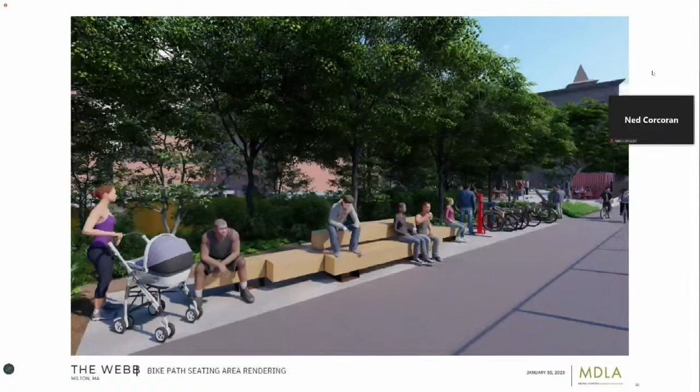And this is what we would be looking to do. So again, it just gives you a reason to stop, especially if we have a storage container over there. Amazing place to read a book, stare at the water, take a phone call.

We want to add some historical informational plaques on the site. So as you enter the site, you have this grand experience coming through the tunnel, but the same thing if you're coming from the bike path -- all of a sudden you say, wow, geez, what is this? We want to introduce them to the site and its historical heritage and give them some background on why the site's so impressive.

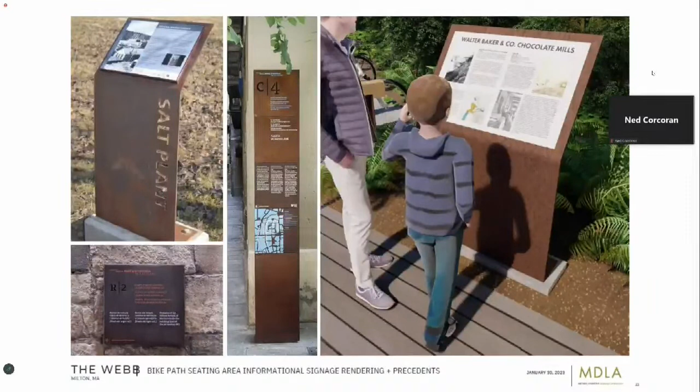I own a real estate brokerage. We do a lot of sales, and a lot of the buildings that have common amenities, common roof decks, are very well utilized. Oftentimes people do gatherings, they invite friends over. It actually becomes a really cool amenity. We make a lot of friends, and it builds a community in the building.

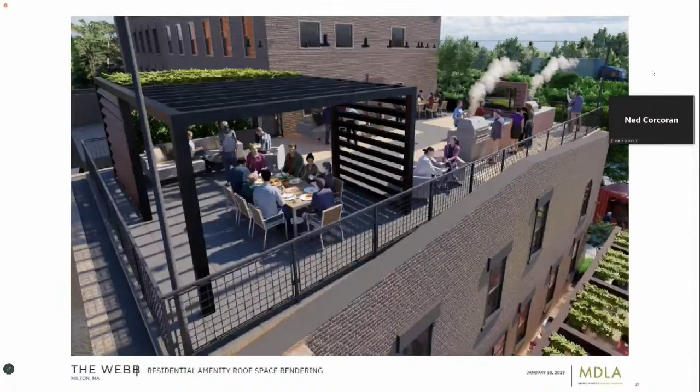This is just a different vantage if you were standing over here. And again, none of this is final -- this is more for conversational purposes to show you where we're thinking. Just another vantage.

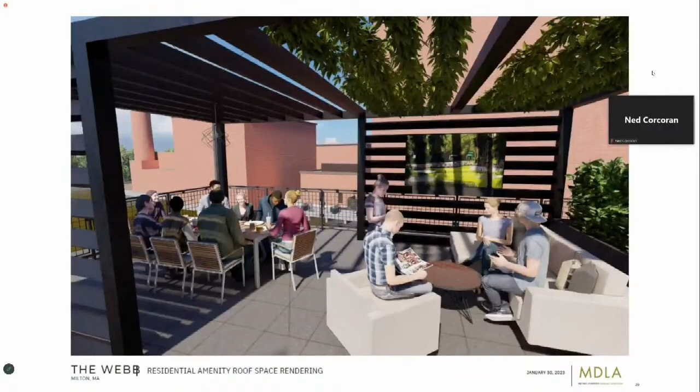I don't believe we're going to brew on site. Most likely we're going to partner with some brewers and serve their beer at the location. Again, I want it to be more of a gastropub, food-forward concept where we do have multiple beer options, but by no means do I want this to be beer only with just hot dogs and pretzels.

I think this is the last slide. Is there another slide, Tim? Is this it? I think that's it, that's it. So that's our vision for the project.

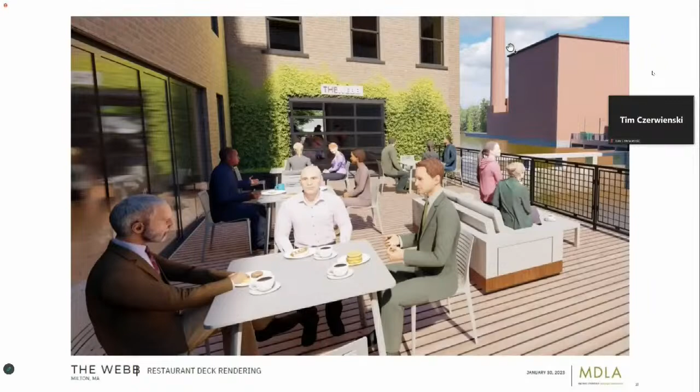I'm open to any sort of questions or conversation. Again, the goal is just to get you all thinking about it. Coming from the Granite Ave presentation, there's probably a lot of items you guys talked about and thought about. I'm hoping to take those in, put together competent answers, and come back to this board on multiple occasions. Ultimately, as Ned and I go through this process, we'll seek your approval.

Well, I think it's incredibly exciting. I think this is just going to greatly add to Milton. It's a very unique setting, and I think the level of thoughtful detail, down to what the bike racks are going to look like, I love everything about your vision for the site. I think it's exciting.

Thank you. And I have some very exciting operators that I'm in conversations with. They're all at that point where it's like, let me know when it's a little more certain. But part of the reason we're so intentional about the design is because the more thoughtful the design, the more exciting the project is, and the better the talent that's going to come in. That's really important to me.

Again, these are not condos. The upper units will be rentals. I'm intending on holding this building for the rest of my life and handing it to my children. So it's important that the right person goes in there, that they're successful, and that we do it right, because it's a massive investment on my behalf, and I want to do it right the first time.

I agree with Meredith, it's exciting. When we did all the work in Milton Village on the overlay zoning, I spent a ton of time walking that neighborhood at different times of the year, and it's so beautiful. The waterfront is so beautiful, so unique. The Baker Chocolate buildings are beautiful to look at, and looking across the river, and the bike path - I ride my bike on it, I walk on it all the time.